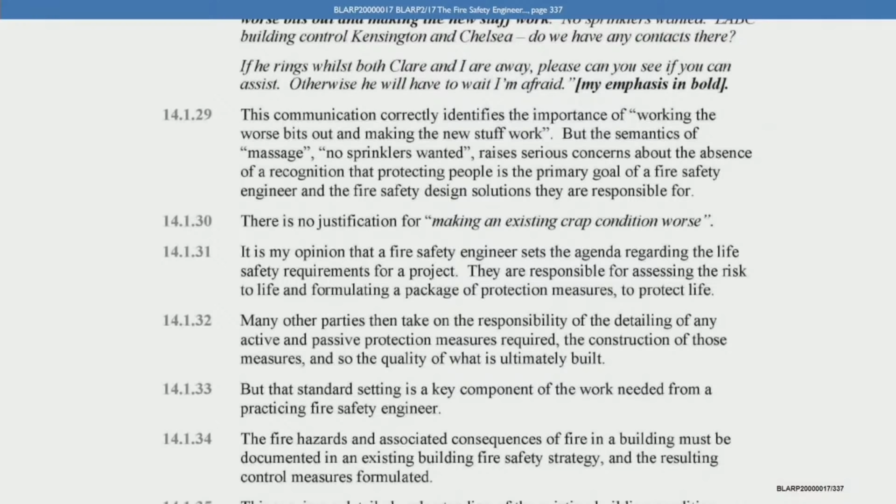Now, given the strong language employed by Exova internally about how they saw the nature of the building, in your opinion, do you think it was incumbent on them to warn their client and the TMO and the design team that the plans for the refurbishment were likely to make the existing condition worse? Yes, I do.

Now, if we go to page, sticking with that page, if we can look earlier at 14.1.26, you say the email seems to reflect a culture regarding the fire safety engineering standards of the Exova team. And then at 14.1.27, you say, I must stress this is not unique.

This email reflects a culture and behaviour I have experienced and observed elsewhere in the construction industry through my own professional work. Now, just briefly, can you explain to us what you mean there by that's a culture you've experienced more generally in the industry? What do you mean by that?

So I think for me, fire safety engineering is about protecting people. It's a massive responsibility, and I used the word scary earlier, and I mean that most sincerely. But when you forget that and you get caught up in the game of making things work, getting things through, you forget about your primary responsibility, which is protecting people. And that has been a problem in the construction industry based on my own experience.

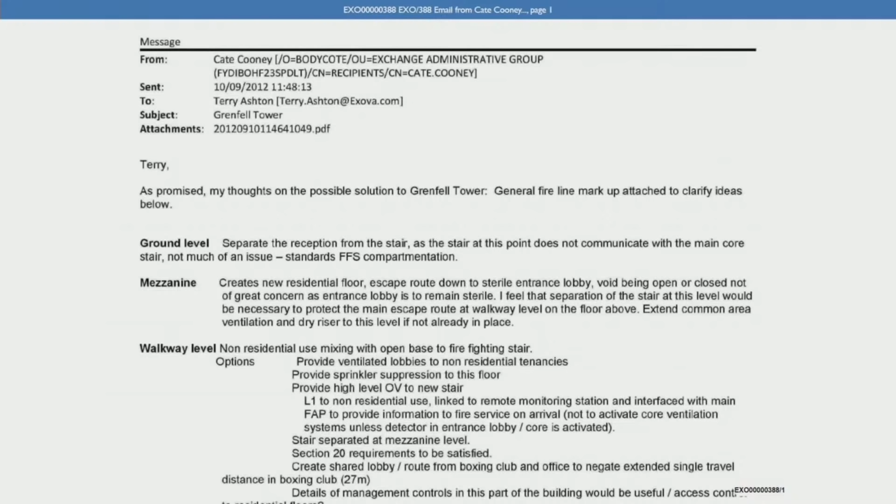Well, I don't know why. I don't know the technical reasons Cate Cooney had for saying the refurbishment was going to make things worse. I don't know that I've read - I hope I haven't missed some correspondence, but I haven't read where she wrote down why she said that. I see. Okay, so I just want, because I feel the need to be very precise, because in an inquiry, I don't know that this list she's sending Terry emanates from things she saw in the primary refurbishment that was making the situation worse.

But perhaps I can ask, in giving the opinions in your report, have you taken into account this correspondence? You've seen this email before. I've seen this email, yeah. But I don't know that this is a list of the things that Cate Cooney thought meant the primary refurbishment was making things worse. I actually don't understand that point at all. So I have read this email, and I see it as her giving some advice to Terry Ashton. I don't know what prompted her to give him that advice, and I don't know how it relates to her opinion that the primary refurbishment was going to make things worse.

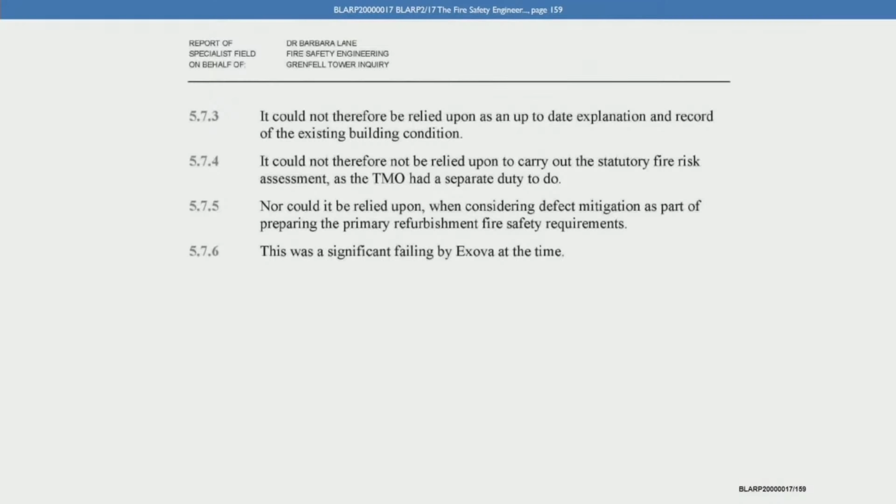Now, just on the existing fire safety strategy, your conclusions are set out at section 5.7 of your report. If we go back to that, page 157 and 158 - and I showed you these before - if we go to the next page, 5.7.2 at the bottom, you've said it's inadequate for any relevant purpose. And then over the page were the other conclusions that I showed you earlier. Now, I want to check, have any of those conclusions changed as a result of the oral evidence you've heard from the Exova witnesses, particularly Cate Cooney and Dr. Clare Barker? No.

No. Okay, the refurbishment work now. I want to discuss that with you. But before we get to the detail of that, I want to ask you some questions about the RIBA stages of work. Now, if we look at page 336 of your report...

I want to look at paragraph 14.1.16, you say this: the significant milestone documents any practicing engineer, fire engineer, relies upon as a matter of course, such as the stage C, D, E reports by the architect and the mechanical and electrical - what's MEP stand for? Mechanical and electrical and plumbing engineer - were available to them in the exact same way as they were for every other member of the design team. Yet I found no evidence those documents were ever considered.

Now, we're going to come back to this paragraph of your report later, but sticking with the first words you used there about them being significant milestone documents, can you explain why you say that?

So when you're working to the RIBA stages, which happened at the primary refurbishment, at the end of each stage the design team produces, you could nearly call it a record of what's occurred and what's been done in that stage. The fire safety engineer has a very important role before those reports are issued because of the coordination exercise that's needed - the updating of the strategy - and so the final version of each one of those milestone reports. There's toing and froing, so that at the end of the stage, the architect's report, the MEP engineer's report, and the fire safety strategy are aligned and coordinated.

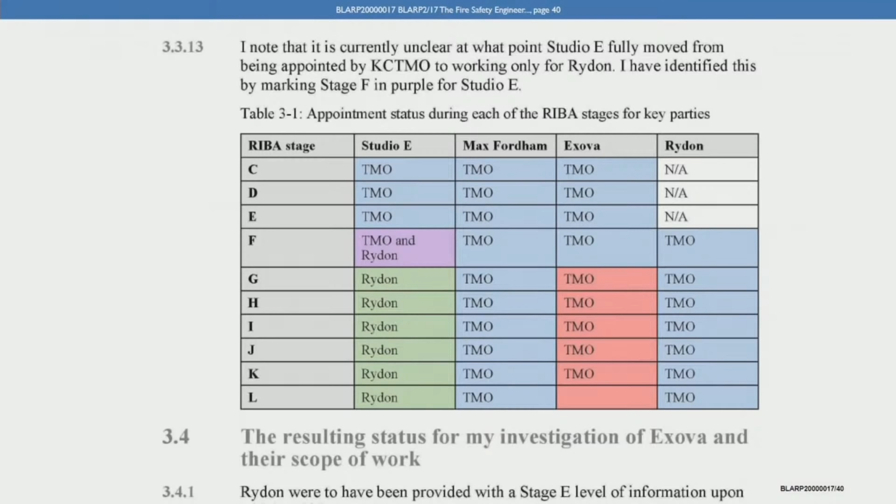If we go to page 40 of your report, table 3.1, what you've done here, in an early section of your report, is fit various parties and the work they did into the different RIBA stages, their appointment status, for those different stages.

Is it fair to say that the RIBA stages aren't in practice always strictly separate? Do you mean C runs into D without a formal moment, or C and D run in parallel? Yes, both. Could that happen? I've worked on projects where they come in very quick succession, though there is generally an understanding in the design team that we are in a distinct stage.

Do you agree that in a design and build arrangement, the stage at which a design and build contractor might be appointed could vary, possibly quite early at stage D, or possibly much later, perhaps stage F? Yeah, there's no set rule as to which of the stages the contractor may be appointed.

You acknowledge in your report that sometimes contractors commence on site as early as stage D, albeit not in the case of Grenfell. Yeah, they may do. For the transcript, that's page 34, paragraph 3.2.6 of your report.

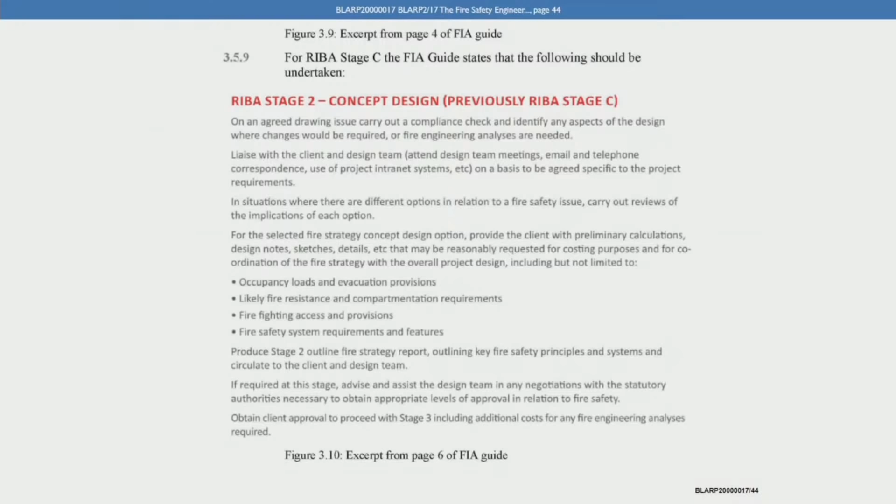And we see similar language about stage D in terms of responding to the design documentation and reviewing that. Now, in light of that, it's clearly a two-way process, isn't it, between the design team and the fire engineer? Yes, in terms of how the work's progressed.

Can you confirm whether in practice it's normal that the party leading the design team, the lead designer, is the one that leads in deciding how much liaison there is with the various consultants, and when and in what form? That may be a limit set upon you as a fire safety engineer.

But where that's not sufficient, I would always make it clear. So for example, if the lead designer said, we want to meet you once in stage C, and I had assessed their objectives on the project, I might say, I'm afraid I'm concerned that meeting once isn't enough for this project, and we would prefer to have 3 formal meetings or 2 formal meetings.

So again, depending on the project, there may be limits set, or there may be a more open quantity of access proposed. And the fire safety engineer has to take care that it will be sufficient for their own purposes. Is it also right that the party leading the design team would be, in quotes, in the driving seat when it comes to information being disseminated to the team?

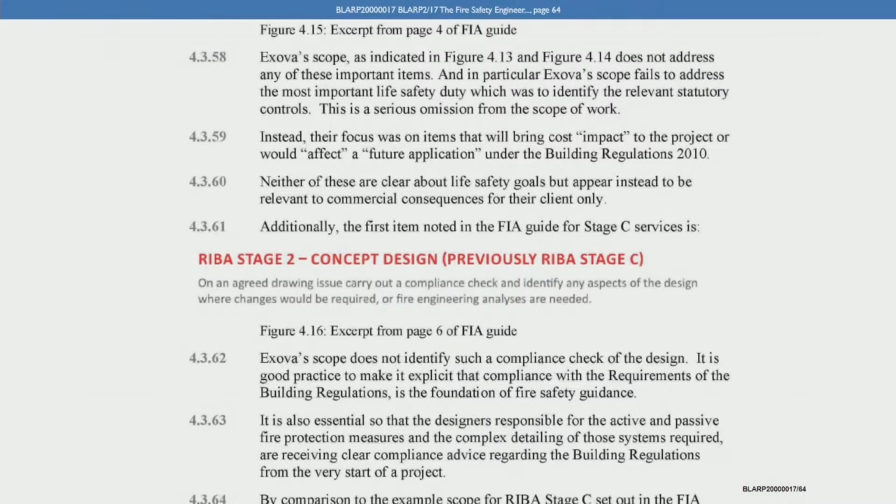And you say at 4.3.65, at the bottom of that page, it's therefore reasonable for me to conclude that life safety was not communicated effectively as the primary consideration within the scope of work for stage C. You see that there?

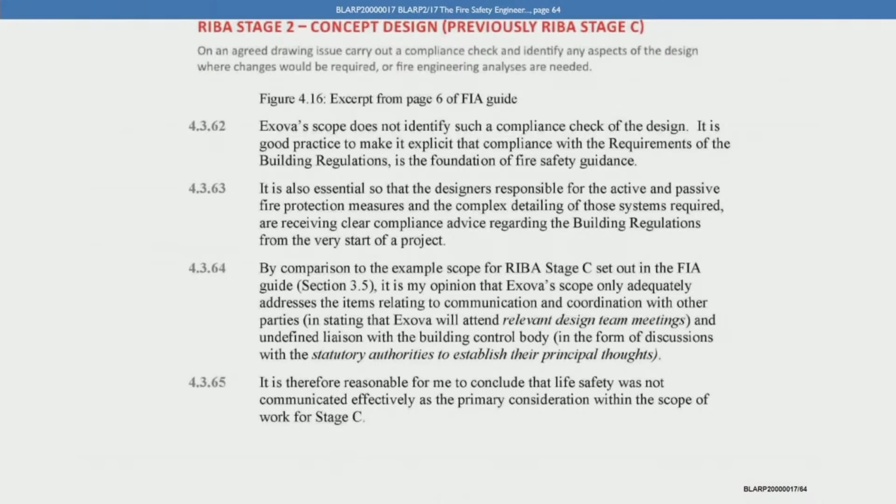Yeah. Now, I just want to take you back to certain parts of the fee proposal. If we go to page 2 of it, EXO00000164, page 2, at the top of that page, just before you get to RIBA stage C.

In the second paragraph under proposed scope of work, it says the aim of the fire safety work would be to ensure a high standard of fire and life safety for the occupants of the building, whilst highlighting any areas of the building's design that may represent an approvals risk. Do you see that there?

Yeah, and then reading on in that paragraph, it says additionally we will recommend ways to resolve these issues to ensure that the fire and life safety objectives are achieved in the most cost-effective way possible, and make sure that the fire strategy does not compromise the architectural concept for the design.

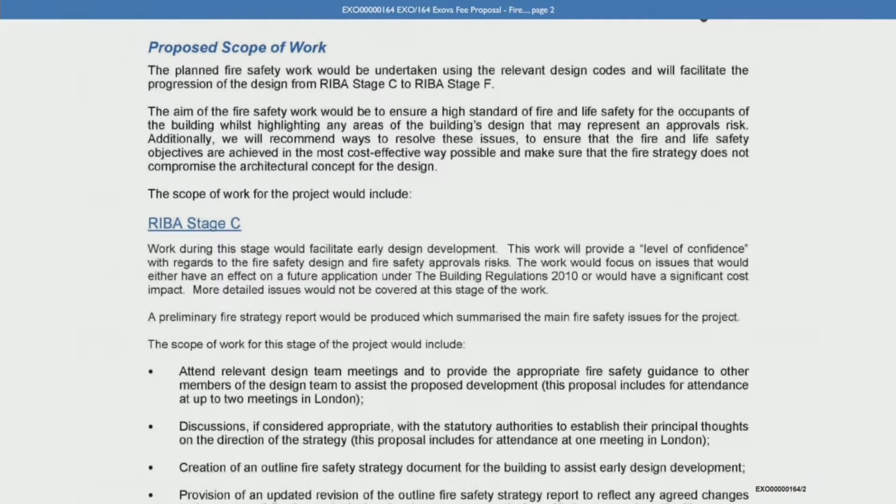Now I also want to show you another passage from this fee proposal letter. If we look on page 3, in the final paragraph under stage F, if we could look there.

Yes, thank you. There it says it should be noted that the paramount objective of the building regulations is the life safety of persons within and around the building during a fire, and any firefighters attending a fire incident. Property protection is not specifically covered by the building regulations, etc.

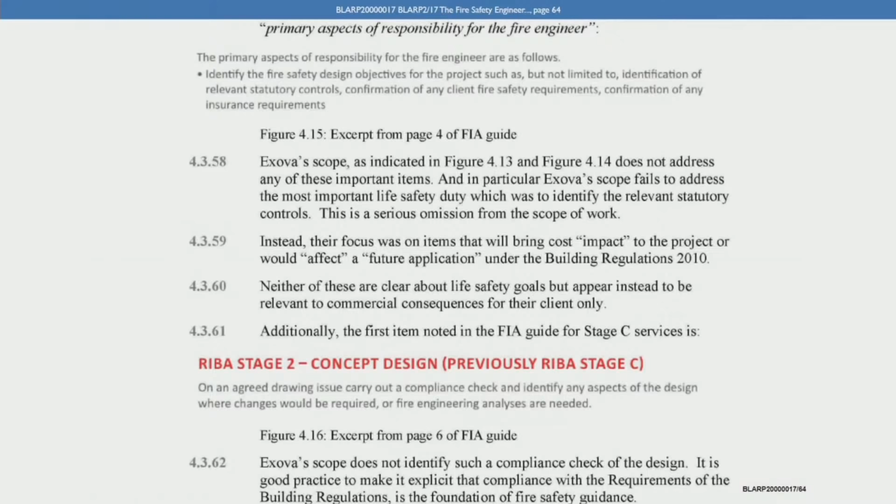Now if we then go back to paragraph 4.3.58 on page 64 - this is where you're dealing with stage C. You say, in particular in the second line, Exova's scope fails to address the most important life safety duty, which was to identify the relevant statutory controls. Now first, can you give me an example of what you mean by statutory controls there?

Yeah, so can you put their fee proposal back up on the screen then, please? I mean, I think as you know, I acknowledge in the other stages that they are very clear about the building regulations in the other stages. This is a review of stage C in isolation. You've asked me to contemplate it now in your very large question, in the round.

Yes, if we bring the fee proposal back up as you want, that's at EXO00000164, yes. And if we go, the stage C part's on page 2, I think, of this. So if we focus on that in the middle of that page.

So is what you're saying that you are critical of this particular section of stage C? Just - well, I shouldn't say just - the language there, yes. I see. And I'm very clear later on that they do refer to life safety.

I have made that point later in the other stages. Yes, so that's one of the key points I want to put to you - do you agree that the passages I've taken you to elsewhere in the letter do expressly refer to the paramount importance of life safety? Which I've already explained in my report I had seen.

Going back to your criticism that it fails to address the most important life safety duty, which was to identify the relevant statutory controls, can we focus on that point? Why do you say identifying the statutory controls was perhaps the most important life safety duty relevant to RIBA Stage C? Well, I just see language around cost and approval risk, not language about compliance with the control mechanism. I don't know where this question has come from, but I think it's overstating the intention of my words.

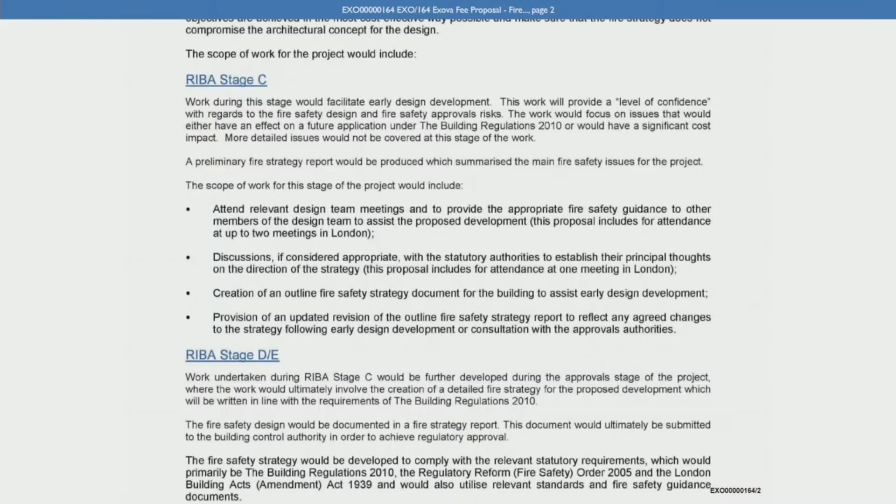So what it actually says is the work would focus on issues that would either affect an application or have significant cost impact. So those are the words you're particularly relying on. Based on things I've seen, I would worry what the meaning of significant cost impact is. And I think when one is going to raise costs, it's important to state there - I think this is the only stage where they deal with cost impact actually, but we'll move on. It would be important to reflect and remind people that in that work, as you've just asked me, it's cost in conjunction with meeting the life safety goals.

Okay, now in relation to RIBA stage D/E, which is dealt with at the bottom of that page, you say in your report that the fee proposal doesn't explicitly allow for Exova to review the documentation prepared by other design team members, and you identify that to be a material omission. Is that correct?

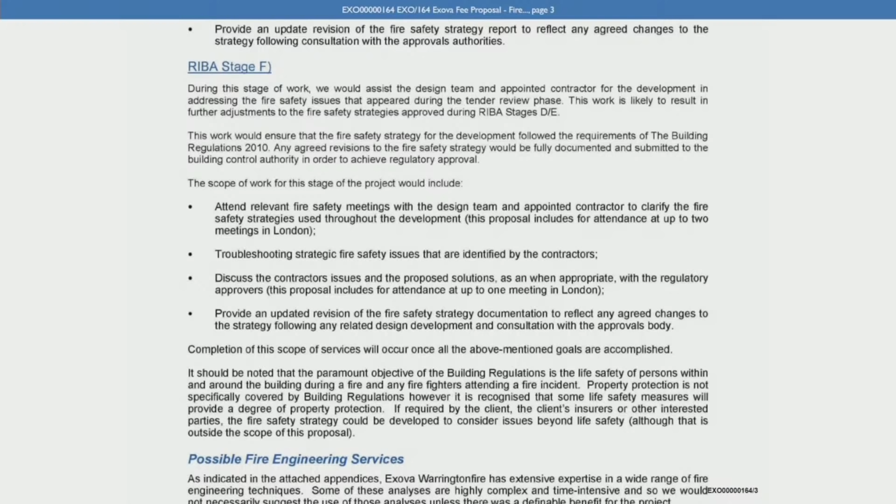Now, do you agree that this document, taken alone, appears to envisage Exova continuing to work on the project after the appointment of the contractor? Yes.

Just help us as to what might happen to a fire engineer in a design and build situation when a main contractor comes on board. Is it right that you said in your report that a number of things could happen at that point? Yes. First of all, they could stay client side and carry on being appointed by the client to advise the client. Is that correct? Yeah, that's correct. Or they might be novated to the design and build contractor. Is that right? Yeah. Or possibly their work might be terminated. Is that correct? That's correct. And as I understand it, you have experience of all of those things in your professional expertise. Yes, I have.

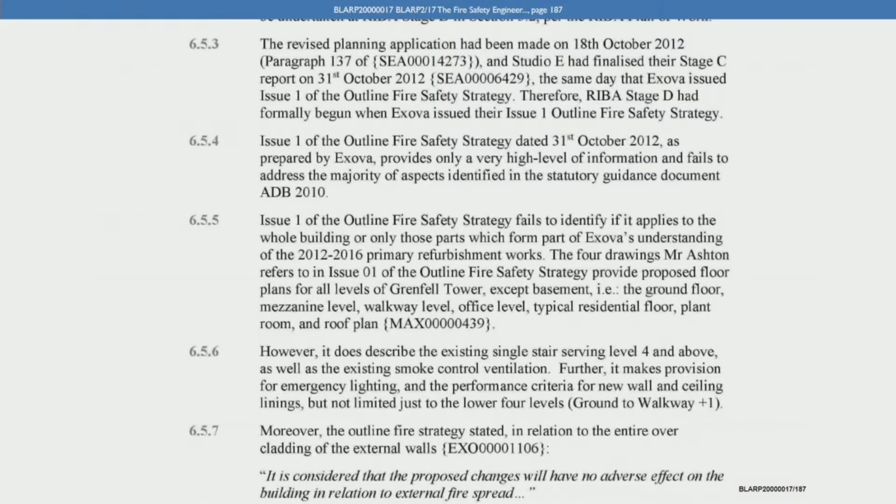The advice, in certain parts of the report, strays into other levels, or seems to refer to other levels. But that's why it's important in an existing building being refurbished - one of the first things you would explain is where you're going to rely on the existing physical condition, where new things are being done, old things removed. It's a very important kind of boundary or basis to explain what your advice is based on, because it's a mix of things and a mix of locations, and that clarity is important throughout.

Now, if we keep going down within this section of your report, 6.5.7, we'll come back to this in a moment, exactly what it said about the entire overcladding of the external walls. And then you say at 6.5.8, it communicated information related to the entire building, not just the four floor levels, listed in the description of the refurbishment.

Exova did not provide a set of fire strategy drawings to accompany issue 1 of the outline fire safety strategy, nor was a marked up set of drawings by others provided in the report.

And again, would that be something that you would expect of a reasonably competent fire engineer at this time, to provide a set of fire strategy drawings accompanying that report?

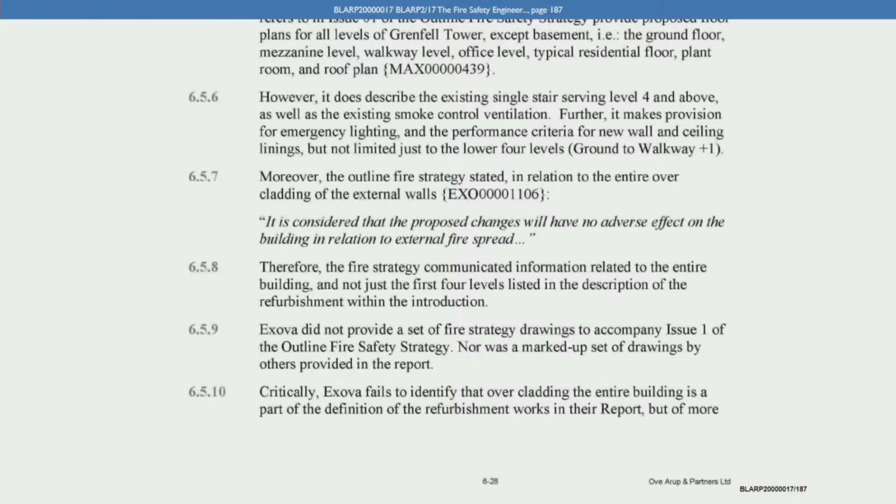But of more grave concern is that they still go on to provide their advice, and we're going to come to that in a moment. So that's what you say about some critical omissions from the report. That's right, isn't it? Yeah.

Now, if we go back to the report itself and look at page 5, EXO 5 zeros, here we can see at 2.1 we get a very high overview of the building regulations 2010, and then I want to look at what's said about B3 at pages 7 to 8.

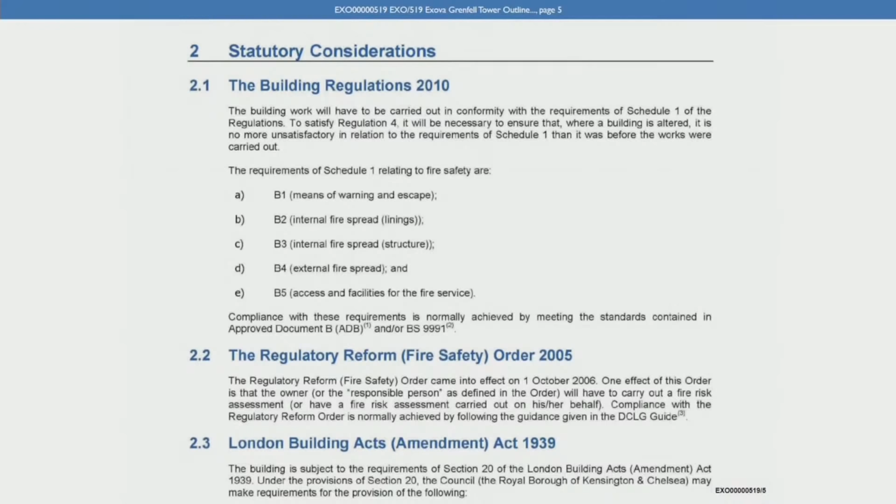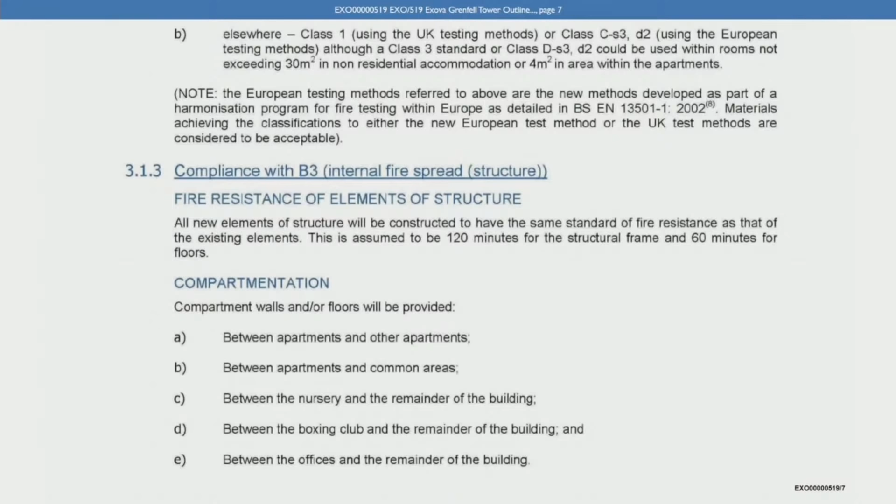We can see B3 there, and that goes over into the next page. There's the end of B3 at the top there, and then into B4. This is just to remind everybody what we actually see in this report on B3 and B4.

And then we've got that familiar phrase under B4: it is considered that the proposed changes will have no adverse effect on the building in relation to external fire spread, but this will be confirmed by an analysis in a future issue of this report.

Now, you've set out your views about the contents of the report in detail, considerable detail, in your expert report, and I'm not going to take you through all of that now. At section 6.5, pages 187 to 189, you summarise your review of that fire safety report. I want to pick it up on page 187, paragraph 6.5.10.

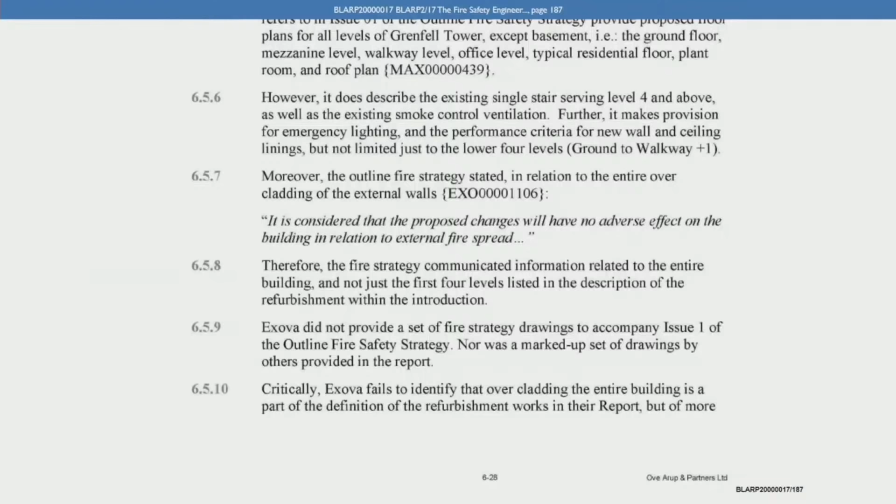So we were just looking at that, fails to identify the overcladding as part of the refurbishment works. And if we go over the page, you say the grave concern is that they still go on to provide their advice that this part of the works would have no adverse effect.

Then you say in the next paragraph, yet the records show the staff at Exova had never analysed the external wall construction proposals, and so were not in any position to make this statement. I provide more detailed evidence in section 9. And then you say, therefore, I conclude this was very serious evidence of professional negligence from my perspective as a practising fire engineer. Do you see that there?

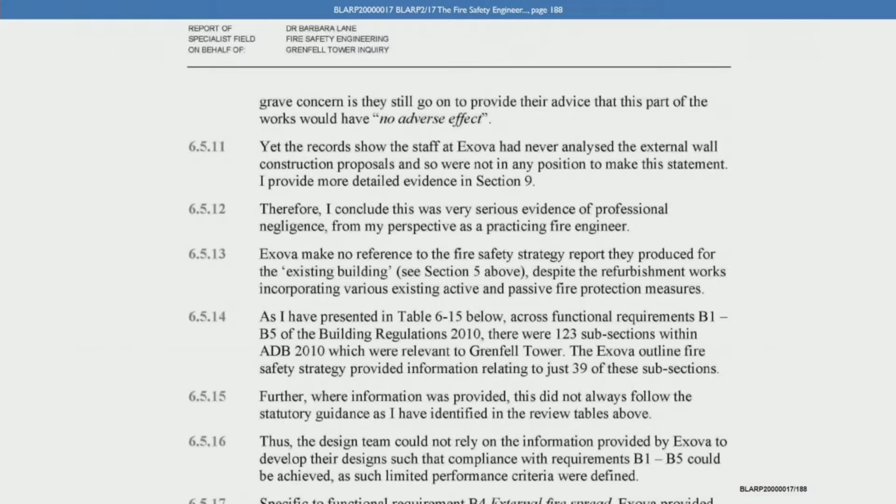Now, do those conclusions remain your view, having heard the oral evidence, including of Mr. Ashton? Yes. Then I want to pick it up at 6.5.17 on that same page further down.

You say this, specific to functional requirement B4, external fire spread, Exova provided no guidance or performance criteria for the external wall construction. And then you say, thus, no performance standard was defined which the design team could rely upon, nor did Exova indicate to the design team that the fire performance of the external wall construction was of any importance. Then you say, therefore, Exova's report is not the creation of a detailed fire strategy for the proposed development, written in line with the requirements of the building regulations, as their RIBA Stage D scope allowed. By reference to my analysis in Table 6.15, the FIA guide for RIBA Stage C and their own scope, issue 1 of the outline fire safety strategy issued at the very end of Stage C did not contain the level of information required for an RIBA Stage C fire safety strategy.

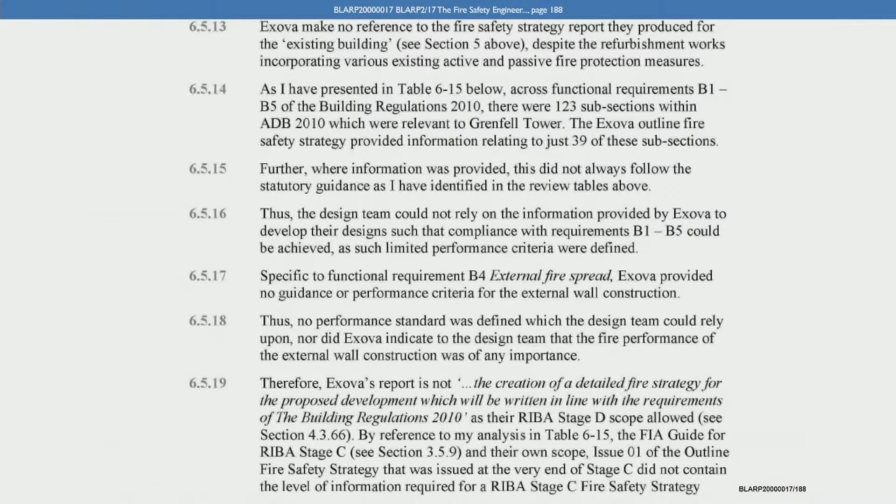Do you see that there? Yeah.

Now, just pausing there, in circumstances where Exova did not have much information at all about the nature of the overcladding prior to writing this report, and if we can just put aside for a moment the Stage C report, which they were copied into on the same day that this report was sent. So I'm going to take you to the RIBA Stage C report in a moment, so leave that aside. What would you expect a reasonably competent fire engineer to say about the B4 requirement in that first report?

So, first of all, to know the building was being overclad, and then to set out as an absolute bare minimum the statutory guidance for insulation, cavity barriers, and the external surface. With no drawings whatsoever about the overcladding, and that has happened many times, the best thing left for you to do professionally is to simply state the statutory guidance minimum requirements.

Yeah, okay. And what would you say to the point that, well, the architect—it's a similar point to the one we talked about earlier—the architect can read Approved Document B for themselves. Is it that difficult for the architect to look at that guidance and apply it themselves?

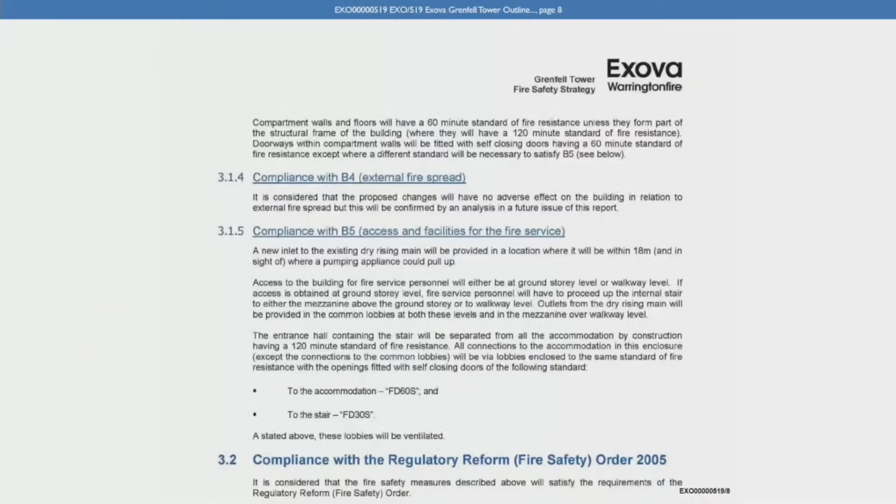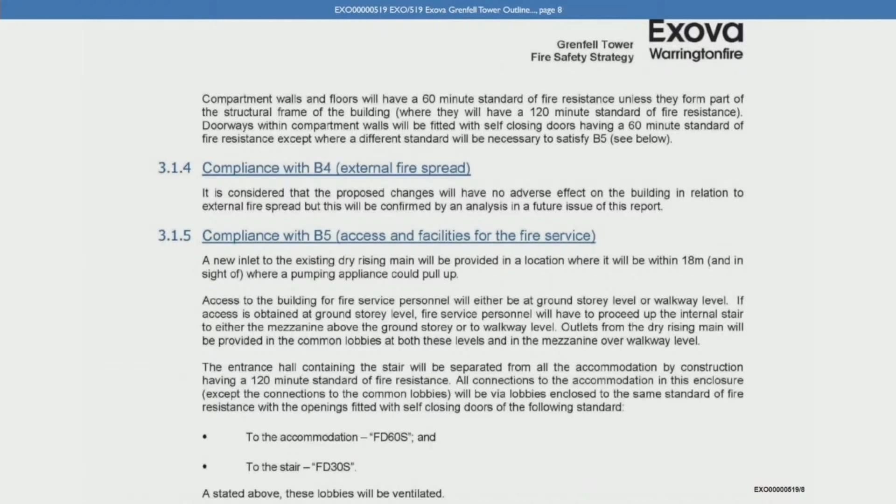I think it's important to bring in the other part of B4, which is to do with fire spread between buildings. It was very common to do numerical analysis for that part - that's space separation, dealt with in section 13 of ADB.

I can imagine if you had a quick look at the site layout and saw where Grenfell Tower was located, I can imagine writing that the proposed changes will have no adverse effect on the building in relation to external fire spread, because that is external fire spread. So you're happy that things look sufficiently far away that you're not worried.

I don't agree that without understanding overcladding, you could immediately assume it would have no adverse effect without information for that part of B4.

So effectively, you're saying this comment deals with space separation under B4, but is completely silent about spread of flame over surface. Is that the point?

That is so. Mr. Ashton has to speak for himself. My experience and the focus at that time of professionals was very much on space separation and those calculations. Those calculations were very common and getting more advanced as well. So based on my experience and just reading it this way, I would immediately assume it was about space separation, not about—

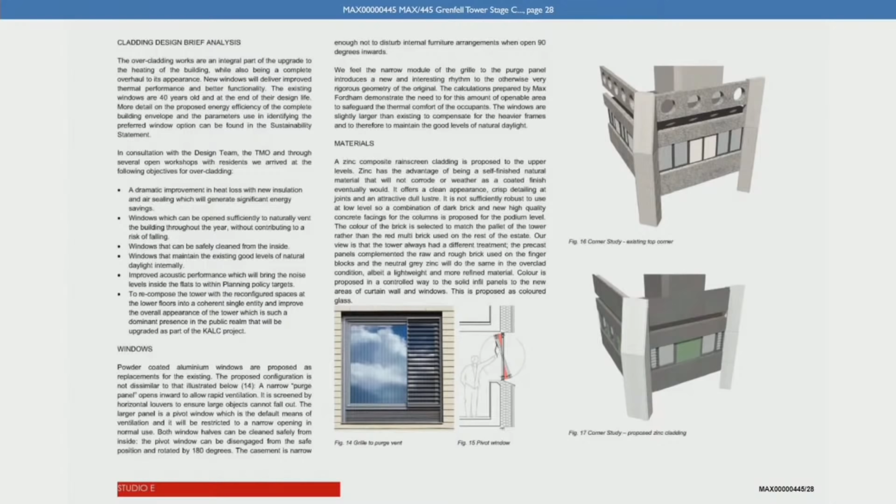So that Stage C report included a section on the overcladding proposals, headed 'Design Approach Overcladding.' And then over on page 28, it said in the middle of that page that at that point a zinc composite rain screen cladding is proposed to the upper levels. Do you see that there? Yeah. And we've got a number of images, and then the advantages of zinc are set out.

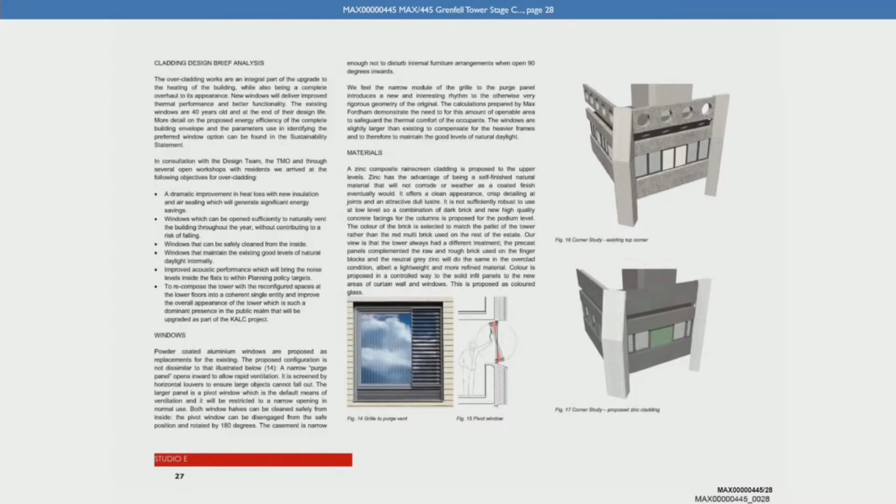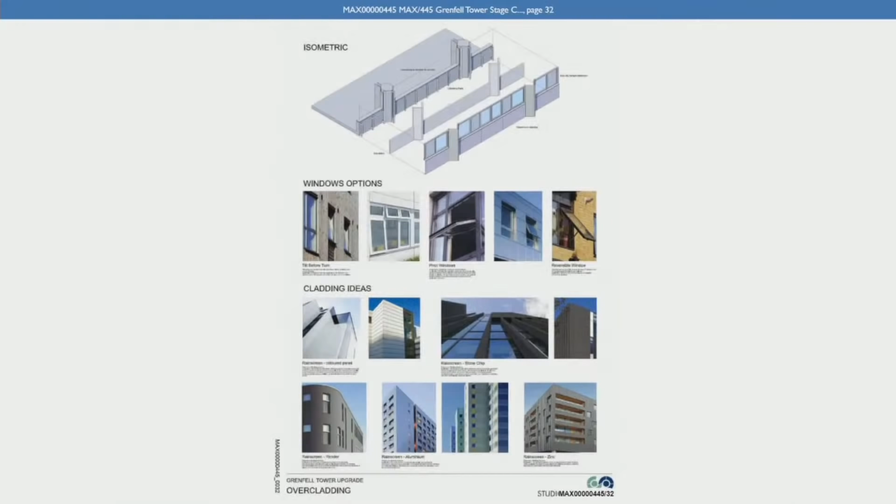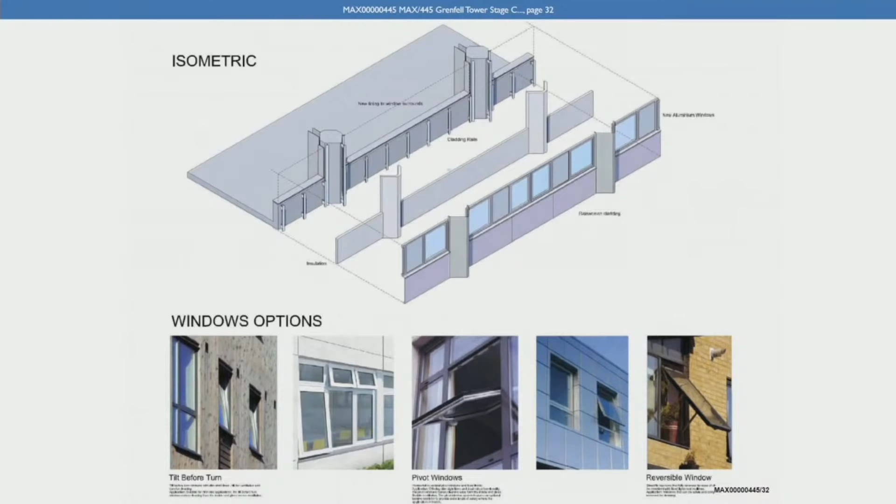And various cladding options are also considered at the bottom of that page. If we go out, including, we see rain screen zinc on the right-hand side, but we've also got rain screen aluminium there towards the middle of the page. Do you see that?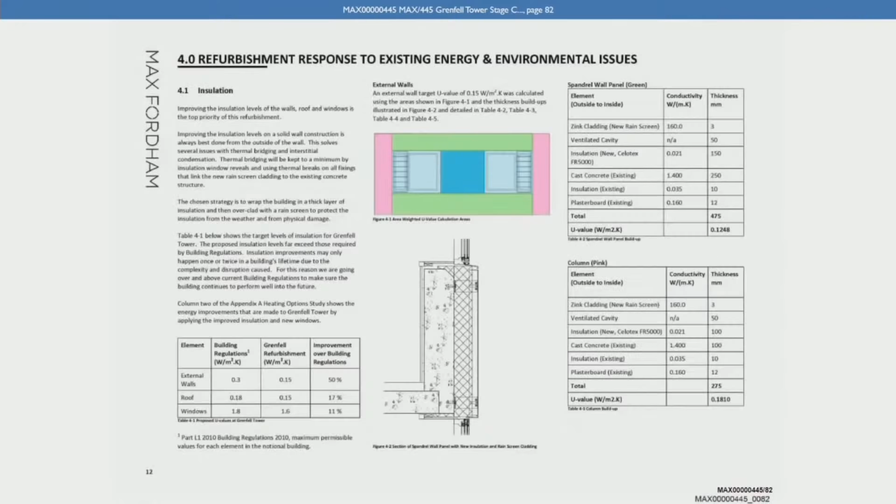Yeah. And then on page 82, later in the report, it incorporates the Max Fordham Stage C report. At the heading 4.0, we've got a heading for insulation. And on that page, you see the insulation is named in that table on the right-hand side, insulation new Celotex FR5000. So we actually know here, although we don't know the exact product in terms of zinc rain screen or other type of rain screen, we do have a product for the insulation, yes? Yes.

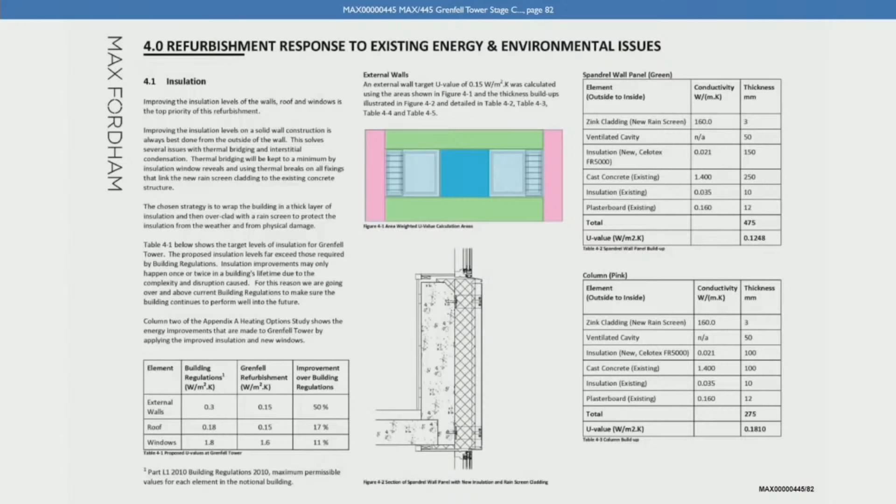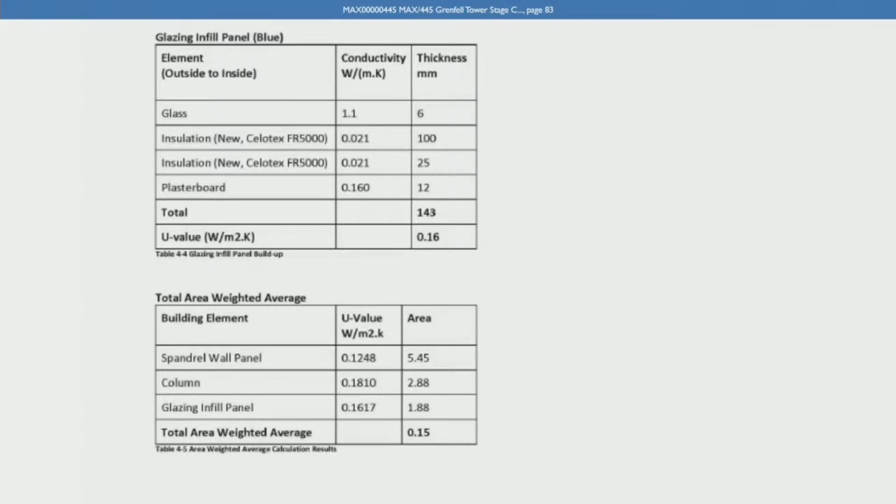And indeed on the next page, page 83, under the heading glazing infill panels, we've got the Celotex insulation mentioned again, in fact twice there. Now I've taken you to those parts of the report where we see information about the overcladding. Would you have expected a reasonably competent fire engineer to have picked out all that information from this report? I think the minimum I would expect a fire engineer in that year to notice was some type of surface, some type of insulation being applied on every story, and nothing further.

Okay, I see. Do you agree that this Stage C report makes clear the scope of the refurbishment project, including the extent of the proposed works to insulate and overclad the building? Yes, so I think that's where you realise the scale of the overcladding as a minimum. Do you agree that it also contains some specific information about what was proposed, including the specific type of insulation and possible outer cladding options? Yes.

Should that information have fed directly into the B3 and B4 analysis that Exova then did in the fire safety strategies? So once by detailed fire safety strategy stage, by the time they came to do the detailed fire safety strategy - I'm not sure what you're asking. I think, again, the minimum would have been the building is being overclad on every story. Some materials are fixed, some materials are not yet fixed. Here are the performances. Is a minimum.

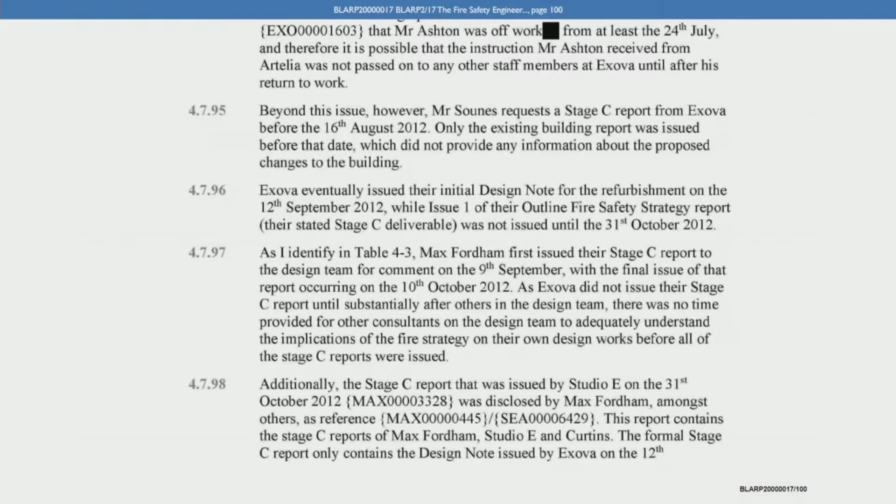You say, as I identify in Table 4.3, Max Fordham first issued their Stage C report to the design team for comment on the 9th of September, this is 2012, with the final issue of that report occurring on the 10th of October 2012. As Exova did not issue their Stage C report until substantially after the others in the design team, there was no time provided for other consultants on the design team to adequately understand the implications of the fire strategy on their own design works before all of the Stage C reports were issued.

And then you say, additionally, the Stage C report issued by Studio E on the 31st of October 2012 was disclosed by Max Fordham, and then you give the references. This report contains the Stage C reports of Max Fordham, Studio E and Curtins. The formal Stage C report only contains the design note issued by Exova on the 12th of September 2012. As I make clear in Section 6, this initial design note was issued as an interim measure by Exova and knowingly only addresses parts B1 and B5. It is silent on parts B2 to B4. And then you say, therefore, Exova issued their Stage C information too late for it to be incorporated into the formal reporting package for RIBA Stage C for the primary refurbishment project. So that's your written evidence on that.

Can you just expand on why it's so important for any work on the fire strategy to be delivered in good time to allow others to digest that work? Because it impacts their decision making and the detailing, the work that they have to do, and they need to understand the basic objectives of the fire safety strategy, and then their design has to enable that for Max Fordham, Studio E, everyone. That's why it's good practice to have the fire safety strategy reports out earlier, so everyone can coordinate, understand, critique, comment, and go back and look at their own work. And the fire safety engineer may have to go back and make some changes too. Yes, I follow.

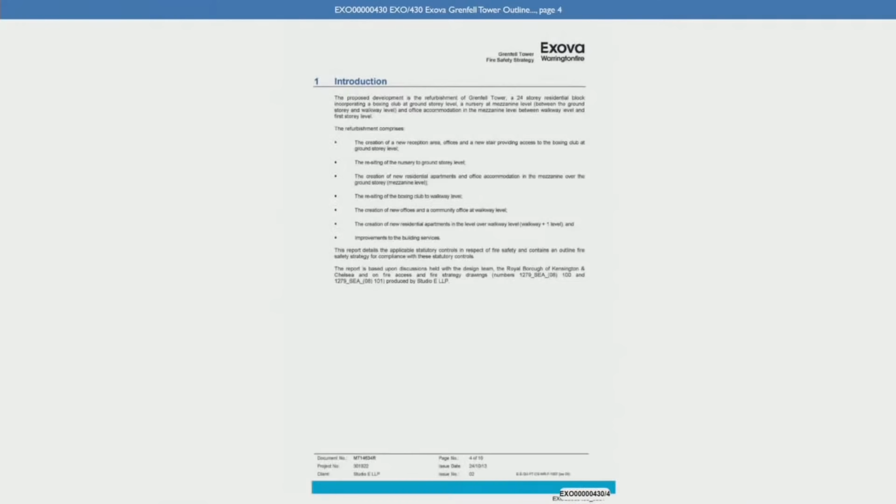Yes. And then page 4, we see from the introduction, there's still no reference to the overcladding in this description.

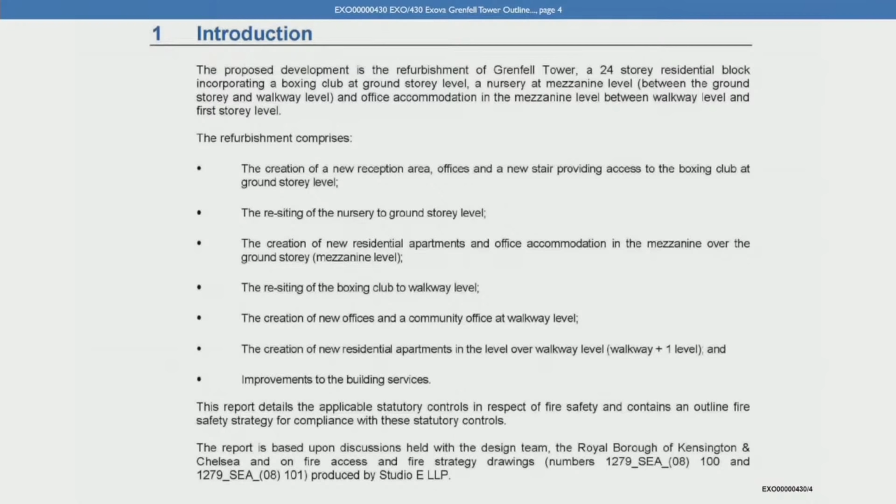Just to be clear, is it your evidence that certainly by this time, well, I think you said it by the first iteration, but that in this iteration, overcladding should have been mentioned at this point? This was an overcladding project.

So the fire safety engineer needed to record that in their reports. And then what we see on page 8, where we see the B3 and B4 sections together, is that these sections were both unchanged. Yes, a year later. And it contains exactly the same statement there for B4 under 3.1.4.

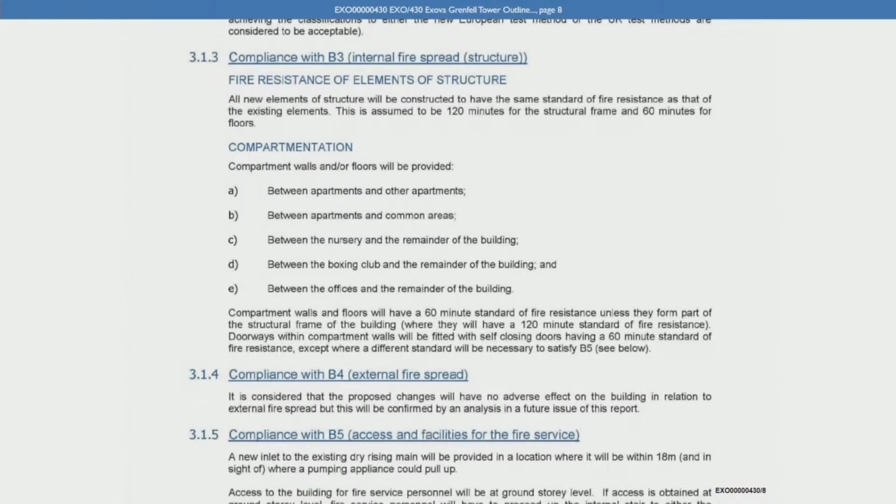Can you help us - in your view, how should Exova have addressed the B4 issue if they felt they still had limited information as to the proposed changes to the exterior? If they had checked the Stage C report, they knew the overcladding was extensive, so just scale.

Now we're into detailed fire safety strategy time, which means it could be the final record of the detailed design proposals by the design team. So as an absolute bare minimum, I would expect to see - there's two parts of B4, remember - space separation dealt with analysis if needed, with a drawing, and section 12 regarding the construction of the external wall, bare minimum writing down the minimum performance requirements for each of the layers. That's bare minimum, not bringing in any post-Grenfell levels of detail.

But we know that by this time, if they've read the Stage C report, they're aware of the proposed insulation. Would you expect any kind of analysis of materials by this stage?

In that year, we're in 2013 now, I don't know what analysis of the materials is implied by the English there, okay? I'm not going to say I think they should have automatically read up about Celotex, because I know that wasn't very common practice at the time, okay? That's why I keep saying, writing down the recommendations or the requirements in Approved Document B is the bare minimum.

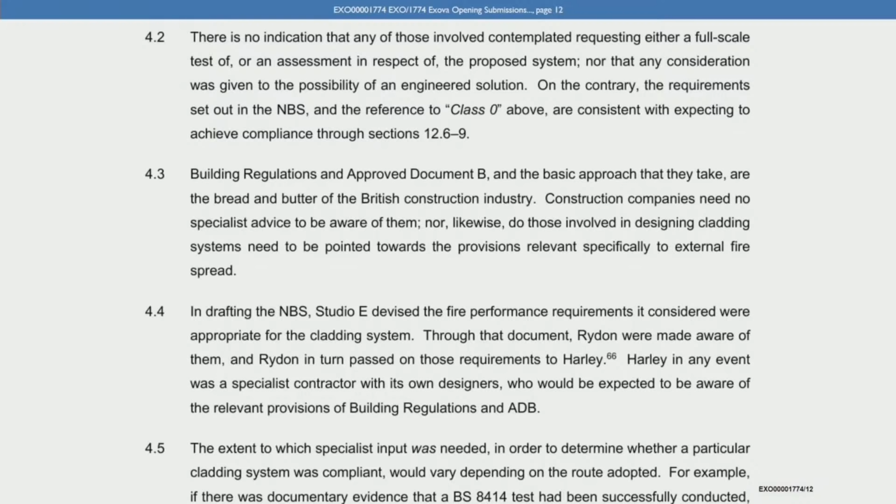We'll take you to another few paragraphs about how this type of point is put by Exova. What is your response to that as a justification for why spelling out the performance requirements would have been pointless?

It's no justification in my mind, because Exova wrote a scope of work, offered a detailed fire safety strategy, were appointed to do so, and B4 is one of 5 significant requirements, and it required information to be provided. I don't understand who gets to decide which parts of the building regulations are so either irrelevant or well known by others that you don't even need to mention them in a detailed fire safety strategy. So I don't agree that that is a valid justification whatsoever.

And then if we go on to page 30 of this document, at paragraph 6.3, A and B, again, this is directly in response to your criticism that the report ought to have set out the required performance to comply with B4.

They make the point in A that the audience for Exova's advice comprised expert architects who evidently ought to have been familiar with the requirements of the building regulations and ADB, and who evidently considered they had sufficient expertise to set out detailed provisions in the employer's requirements without seeking further specialist input. Now, I've already touched on that point with you about architects, but what is your response?

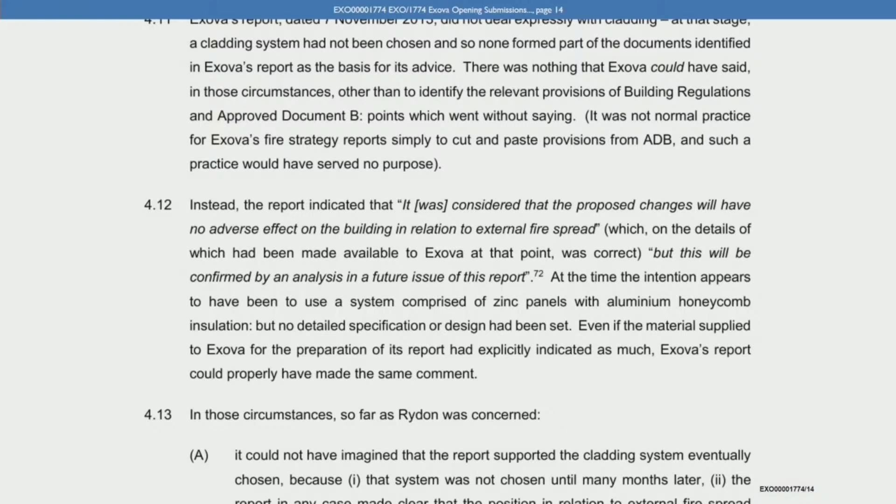So they're making the point that at the time, certainly the primary system being considered was the zinc panels with the honeycomb core, the Proteus zinc honeycomb. And they're making the point that in those circumstances, even if more material had been supplied to them, Exova's report could properly have said the same thing.

Do you agree with that? No, I don't. Can you help us as to why? Yeah, so just to remember, this is Exova's Stage E report, their detailed fire safety strategy. I understand that one of 4 proposals was the zinc with the aluminium honeycomb, and I understand the context that they weren't asked for their opinion about any of those particular products. But the insulation performance taken together with the external surface is relevant at Stage E, when you're preparing your detailed fire safety strategy, making clear the minimum requirements.

So that's back to the fact that you say it should have been flagged up that any insulation should have been compliant with 12.7 of ADB. Yes, and I don't know what date this text is referring to, but there were 4 products in the specification. You mean in the NBS specification? In the NBS specification, 2 of which were zinc, and the other zinc product was a polymeric zinc panel.

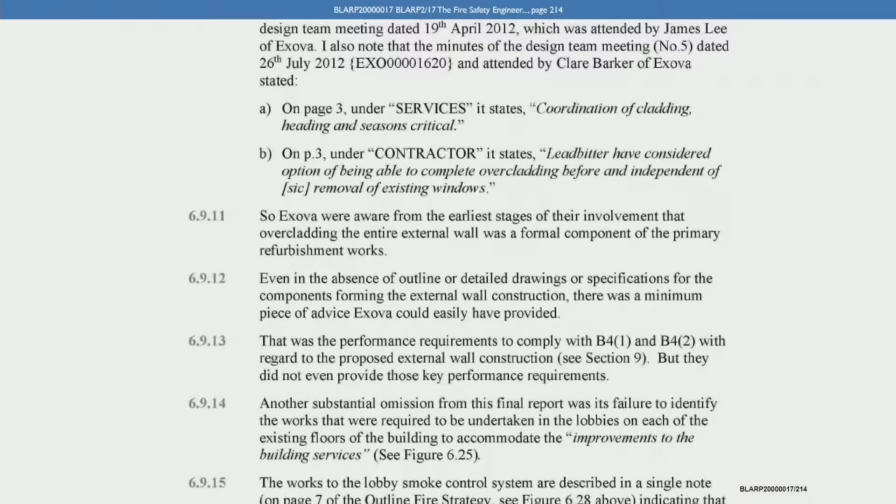Can we just move down on that page? 6.9.15. Are described in a single note, indicating that Max Fordham was solely responsible for the performance, specification and design of the system.

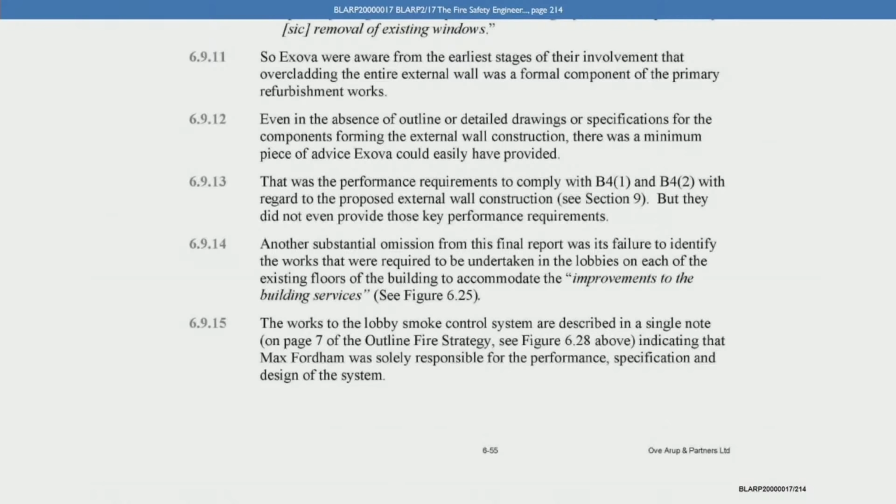And then if we can look at page 216, 6.9.24, you also say, ultimately, Exova did not provide a set of fire strategy drawings to accompany issue 3 of their report. In fact, specific reference to the Studio E drawing numbers for the fire access and fire strategy drawings were removed, and no other specific design documentation was referenced.

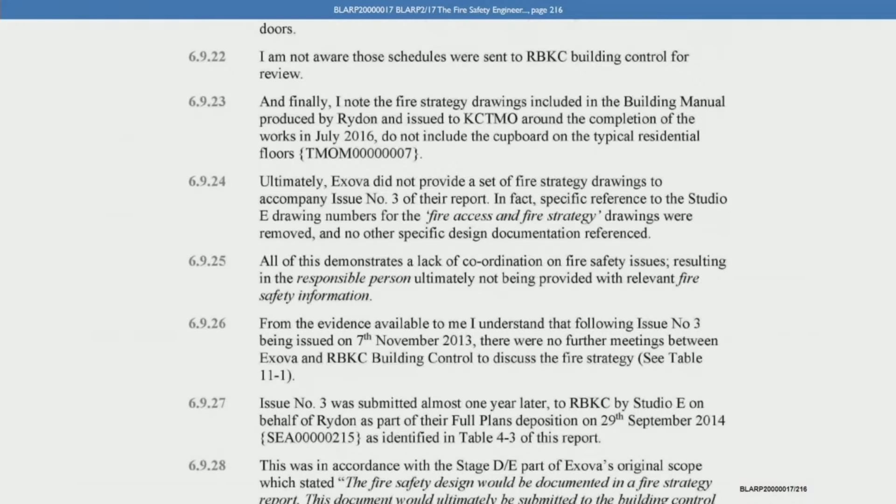So just pausing there, you're critical of the fact that there was no set of fire strategy drawings accompanying that third issue of the report. Is that correct? Yes, because you need the detailed information on the drawings with the narrative, the detailed narrative in the report to understand the basis for the fire safety design. We tend to not produce our own drawings. We tend to mark up others' drawings. Other fire safety companies do a set of fire safety drawings.

Yeah. And then in the next section of your report, 610, you compare the scope of the report with what Exova had promised in their fee proposal, and you compare it with approved document B. And then if we go on page 224, at section 612, you set out your conclusions on the adequacy of the primary refurbishment fire strategy.

And you say in 612.2 at the top there, based on the evidence I presented, it's my opinion that Exova's outline fire safety strategy report was wholly inadequate with respect to providing relevant fire safety design guidance to the design team, the client and the contractor. And you go through a number of failings, including not dealing properly with B3 and B4 in that next section.

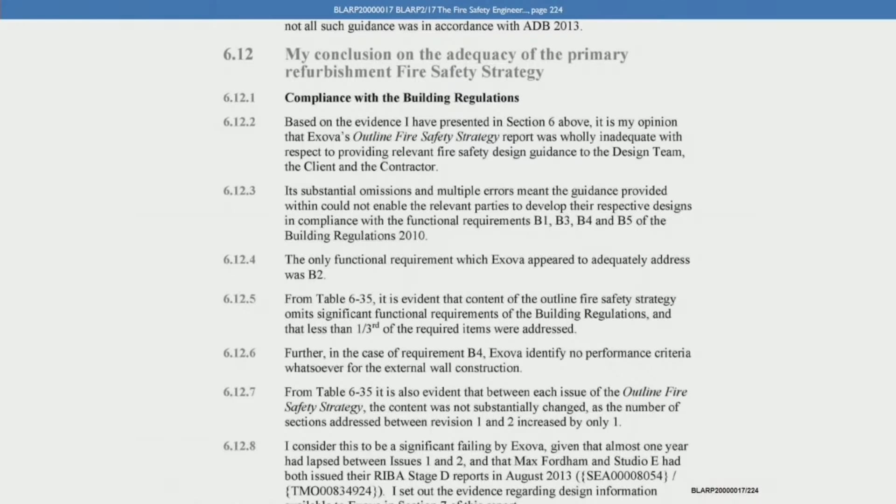And then you're also critical at the bottom of 226, if we can go to that, 612.30, of the fact that there's no reference back to the existing fire safety strategy. Is that right? Yes. The two weren't linked together. Yes. There was no reference to that work. Is that right? Yes, that's correct.

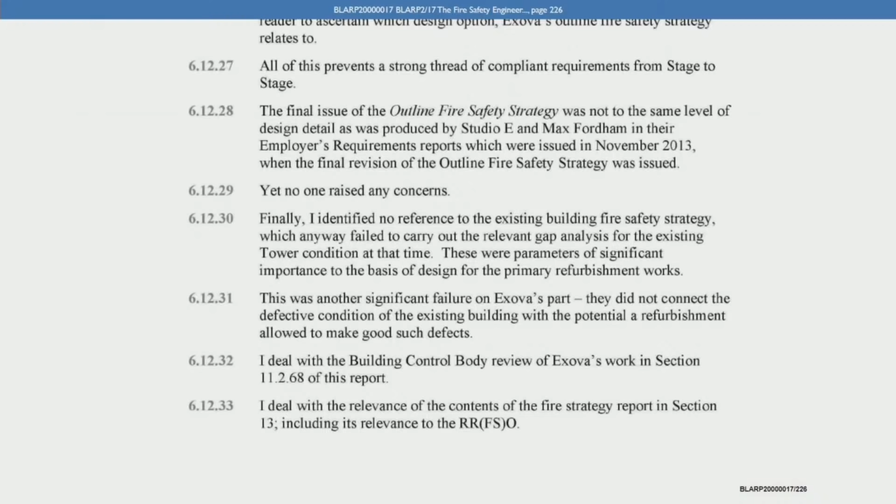And then if you go, yes, so those are your conclusions. Now, I've done that at some speed because you've set out your conclusions in detail there. Can I ask you whether anything you heard in the oral evidence of any of the Exova witnesses, or indeed any other witnesses, has caused you to change your views in any way about those conclusions? Sadly not, no.